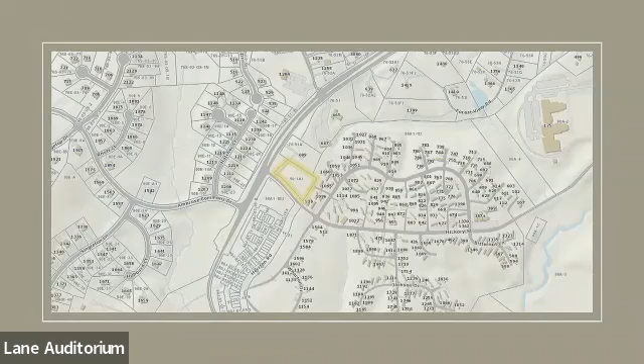This is an application for a building permit for the apartment buildings in Block 12 of the Southwood development. That site is located at the northeast corner of the intersection of Hickory Street and Old Lynchburg Road, at the northeast end of the overall Southwood development. It's the only block that falls within the entrance corridor overlay. Old Lynchburg Road is classified as an arterial from the city boundary only as far as Hickory Street, which is why the entrance corridor overlay ends at that point.

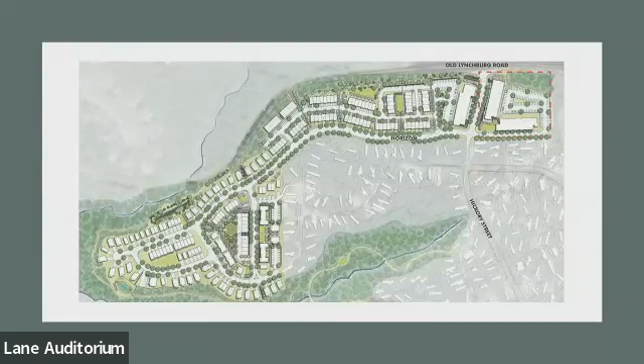You'll also recall from our February 6th meeting that the site plan for this project was reviewed without ARB input because the arterial status of the corridor was still in question when the plan was submitted. That final site plan has been approved, so your review today is not about the site plan. It's limited only to the architecture of the buildings.

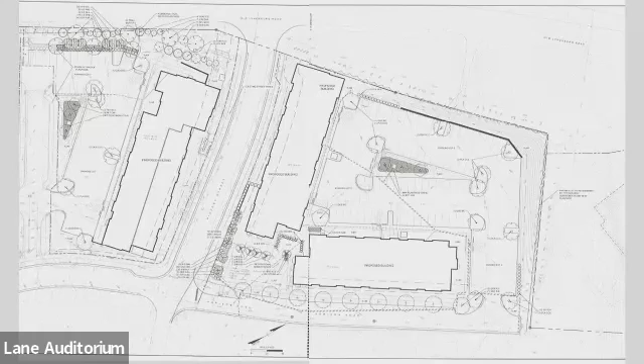One thing to note about the site plan, however, is that the trees between the corridor and the buildings are not located on the Southwood property. They're in the right of way and not under the control of the applicant. I'll just point out that the color rendering of the plan shows trees to be added in that area, which is not consistent with the approved site plan.

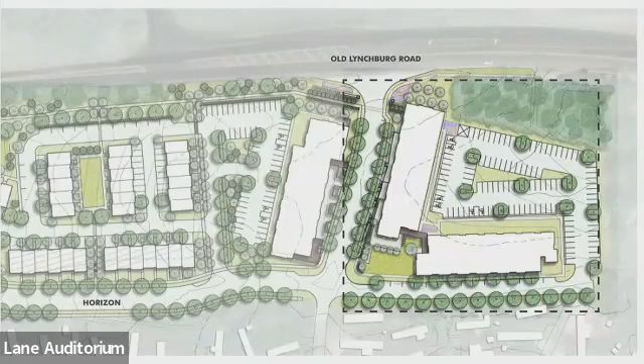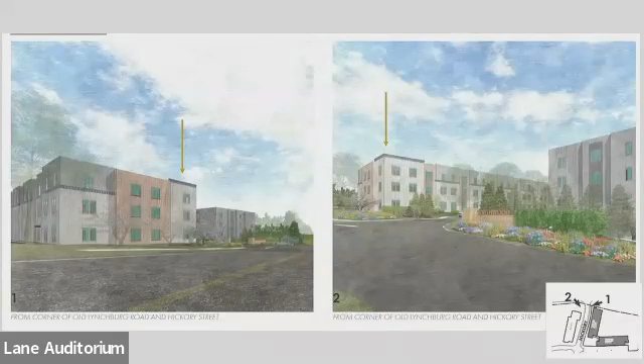The approved layout of the site orients the buildings towards Hickory Street and toward the corner where Hickory intersects with Horizon Street. Consequently, the building elevation that fronts on the entrance corridor doesn't have the appearance of a true front. The corner bay of that elevation, however, is given some extra detailing at the cornice, which is an appropriate treatment for the location at the entrance to the development at that corner. But in our analysis, we recommended that the applicant consider revisions that would establish more of a front facing the entrance corridor.

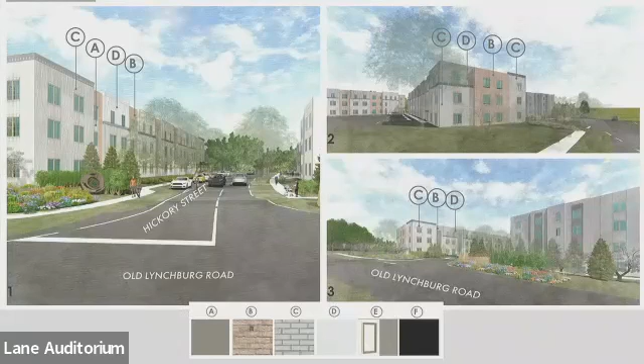The proposed building materials include two shades of brick and fiber cement panels in khaki brown and white. The shade of white is Arctic White, which the ARB has limited to trim and decorative elements on other projects in the entrance corridors. We have not recommended an alternate color in this case because the color is also used on the apartment building across Hickory Street. It's appropriate because it will contribute to establishing an integrated streetscape and an integrated overall development.

Window glass specs were not included in the original submittal, but the applicant has confirmed that the glass meets the guidelines criteria, and those specs should be added to the drawings. Finally, the applicant has provided information showing that rooftop mechanical equipment will not be visible from the entrance corridor street, and that standard note still needs to be added to the plan.

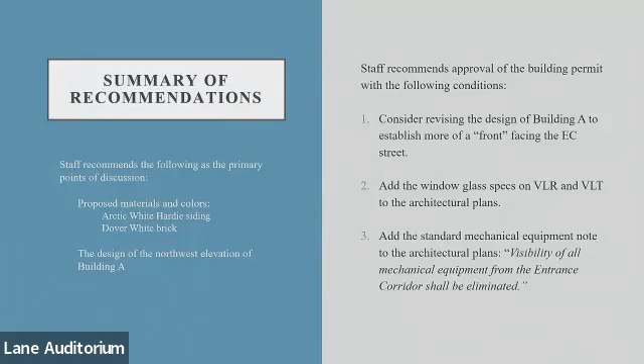So our recommendation is for approval with the condition that the two standard notes be added to the plans and that consideration be given to establishing more of a front on the entrance corridor street. Happy to try to answer any questions that you might have. All right, thanks a lot, Margaret.

If any ARB members have questions for staff, Frank, do you have any questions? No, I don't. Thanks, Margaret.

Dave, any questions? Thank you, Margaret, for highlighting that the trees by the EC are outside the applicant's control. Are there any relevant landscape requirements for parking lot trees or others that would require any trees on the site plan that are included?

There would have been some entrance corridor requirements for parking lot trees, but that would be addressed with the site plan, so we're not addressing that today. Thank you for reminding me.

No further questions. All right, thanks. I do not have any questions.

So it's time for the applicant's presentation.

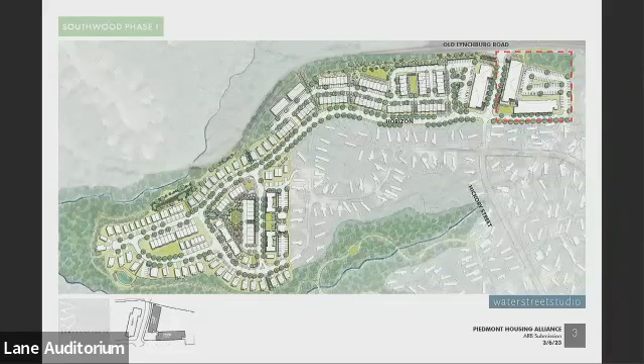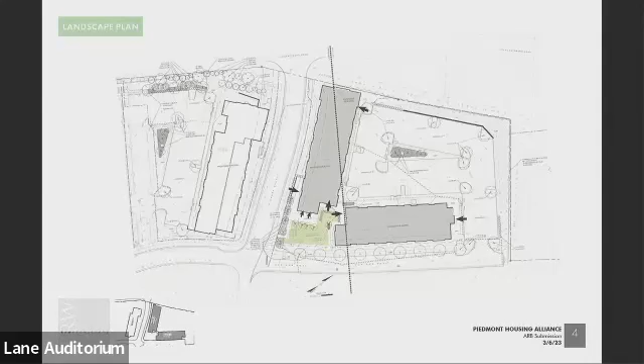The main entrance points of the building are those black arrows, either from the parking lot, but the main ones surround that first corner park, the main focus of the building design. You can also see in this small floor plan that the building is generally a double-loaded corridor. This is the first floor.

On the first floor, there are 1, 2, and 3 bedroom apartment units at the ends. As you approach that corner park, the uses get more public: the elevator, lobbies, mail room, that kind of stuff is around there, but also a community room to be used by all of Southwood.

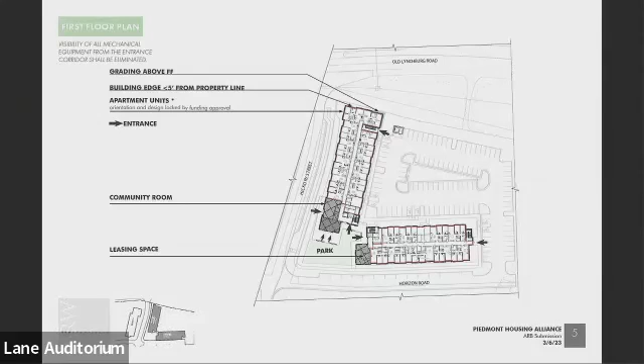And I would note that that corner park is also public and open to the public. On the other building, there's a leasing space for Piedmont Housing Alliance. That's how the buildings are designed to work.

This is the slide I showed last time we spoke, outlining the building's design and funding context and funding history, for a larger context of what the building design has been through.

I should note that 100% of the units are affordable. It's financed primarily with low-income housing tax credits, which are awarded and administered by Virginia Housing. The equity raised from the credits reduces the amount of loan required to construct the project, and that keeps the rents affordable for low-income households.

As I said, 100% of the units are affordable, and all of the units are also accessible in accordance with universal design guidelines.

The funding mechanism, LIHTC, low-income housing tax credits, is tied to a process that really kicked off for this project in February 2021, when we brought a detailed design level building to the Southwood ARB, and they approved it.

We followed quickly by submitting for those LIHTC credit awards in March 2021, and those were awarded in June 2021. The site plan that Margaret mentioned was originally submitted in the spring of that year as well. By December 2022, the final completed drawings were submitted to that funding source, and they were approved by early January 2023.

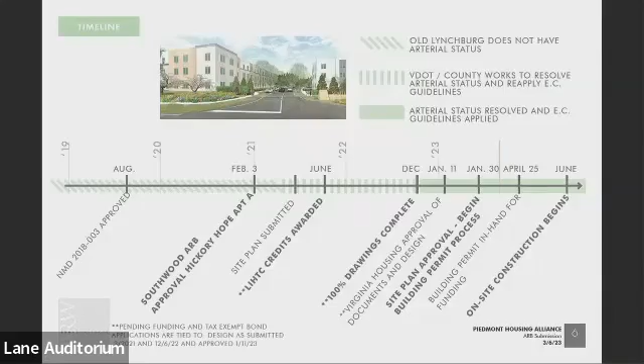And then last time we talked, we also mentioned the ARB entrance corridor guidelines and then overlaying those with the Southwood internal ARB. I mentioned we went before them in February of 2021, and they gave approval of this building, the internal ARB at Southwood. That internal ARB was created out of the rezoning for the first phase of Southwood.

It's a requirement of that code of development to have an internal ARB. I pulled out a lot of text here, but it's from the actual design guidelines from that neighborhood, and those guidelines are based on the actual rezoning itself, the tables in that rezoning code of development. And the key takeaway there is there's a lot of

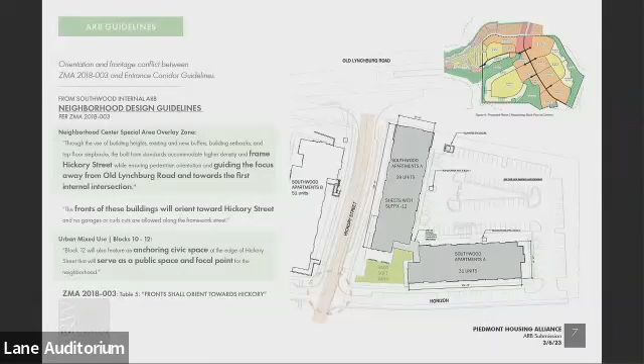emphasis on Hickory Street. In the upper right corner, you'll see an overall master plan for Southwood. The red is designated as a special highest density zone that residents see as more akin to a downtown Southwood, really focusing around this first intersection at Hickory and Horizon. And that's why that corner park is located there. That's kind of sparked the design of the buildings themselves, the entrances and everything, to be focused around that park.

I know that the comprehensive plan, and I think the Southern and Western neighborhood master plans, really want to increase the orientation and the entrance corridor guidelines on this road front, but it doesn't exactly exist yet. So the Southwood residents, and per the Code of Development, are really trying to create a walkability within their own neighborhood, and hence this hub around this park.

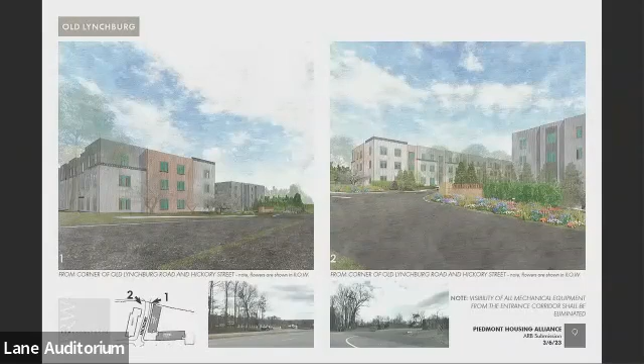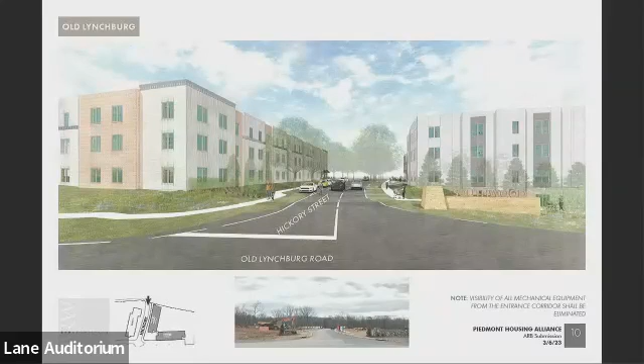So now I'll jump into these drawings, which we've seen from Margaret's presentation. These are the southbound first, and then the northbound on the entrance corridor of the building, and then the approach into the neighborhood, the building on the left, and then adding that corner park render to the other three, just to show the hope for the building that by using a variety of materials on these faces, we are hoping to increase the activity in that area and reinforce that with the design of the building.

So apartment A buildings are meant as one of two bookends to the main entry of the Southwood neighborhood. They're designed, like I've been saying, to pull the visitors into the neighborhood to that first main focal point, which is the corner park. They're designed to try to mitigate the large scale of the building, which is kind of inherent to the economics of the multifamily building, by providing bays that break it down to the scale of the townhome.

So let's see, I guess another thing I will say about the design of the building, which I know is not fronting the entrance corridor, but it gives more context for the overall thinking of the building, is that it's trying to emphasize the corner park as the active hub and frames it with the buildings, and it's meant to offer a variety of textures and layers there that point to that as kind of the entrance of the building.

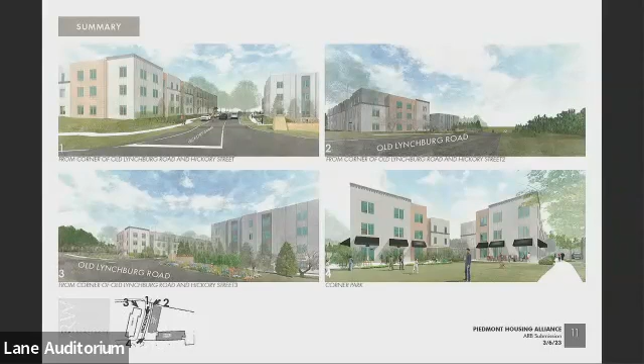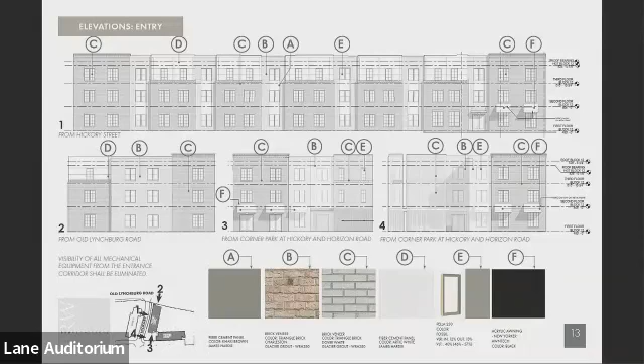And the rest of the views are shown here. So number 2 is actually the face that is for discussion today. It has the cornice high at the corner, again trying to be a bookend to that entry point. And then the other faces are the two that front on the park. You'll see there that an awning comes into play, again trying to signify that area as the most public.

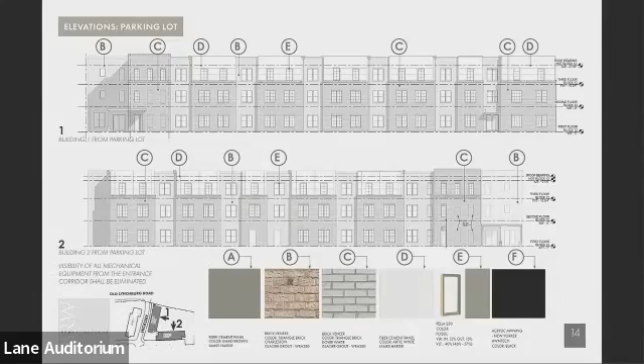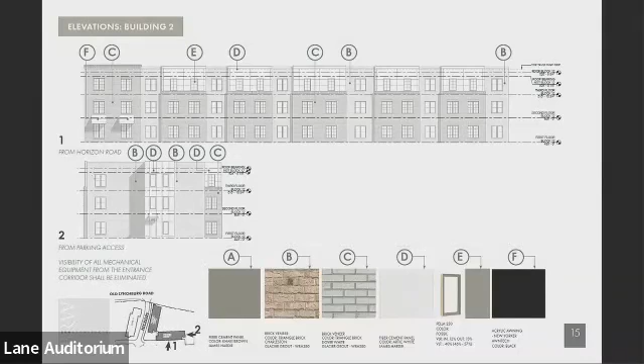Same materials. And then marching around that building, not visible from the entrance corridor, side one, the long side, very similar. And then on the short end, also not visible from the entrance corridor, is an area of entrance point. So that's a summary of the building.

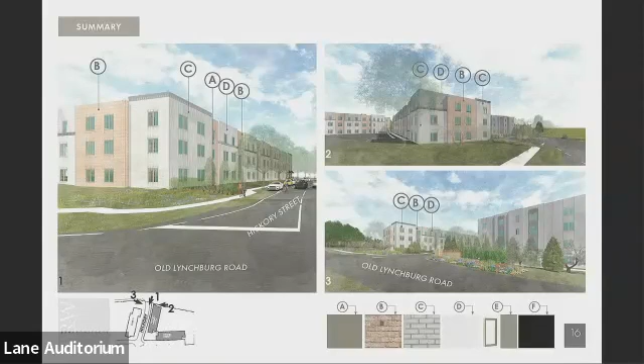And here again are those main entry perspectives. And that I think is the end of my presentation.

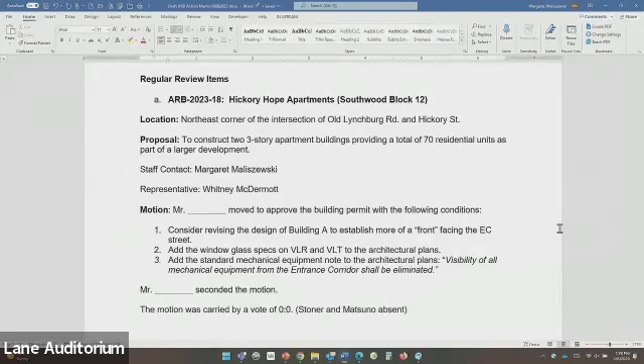Dade or Frank, do you have any suggested modifications? I don't have any at this time. I don't either. No, I don't either.

Would anyone like to make a motion? Sure, I'll move to approve the building permit with the following conditions as listed below, items 1, 2, and 3. I'll second. All right, great. Let's put it to a vote.

Mr. Vanderwerf, Aye. Mr. Hancock, Aye. Mr. Henningsen, Aye. Thank you. All right, thanks a lot.

We'll move on to our work session. We have one work session today, on the entrance corridor design guidelines addenda. Mariah, is your presentation ready?

Yes, thank you. Hi, everyone. Thank you for your time and continued work and review of this project. Today we'll be reviewing the draft entrance corridor addenda for Route 53.

Route 53 runs between Route 20 south of town and the Fluvanna County line. The corridor is fairly rural in character, but contains several notable landmarks and developments accessed along the way, including Monticello and Michie Tavern. Regarding zoning, with the exception of a short length zoned Monticello Historic District near the entrance to Monticello, properties along the corridor are zoned rural area.

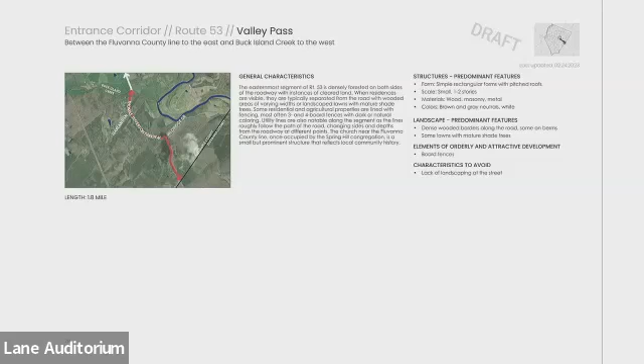The corridor is divided into three segments, and I'll go into each of those. This is the overview sheet from the corridor. Starting at the Fluvanna County line and working toward the center of the county, the first segment is called Valley Pass, for the area topography and experience along the roadway. This segment is densely forested on both sides with instances of cleared land. When residences are visible, they're typically separated from the road by wooded areas or landscaped lawns with mature trees. Board fencing is also a prominent feature along this segment.

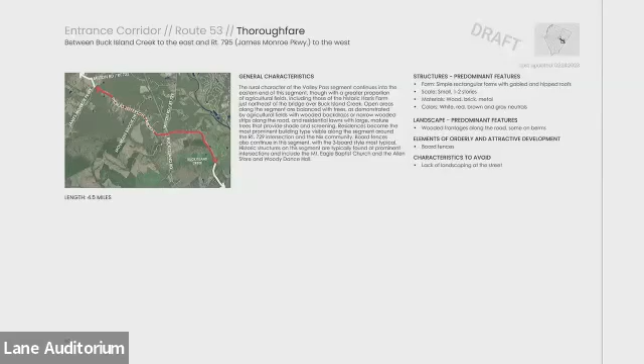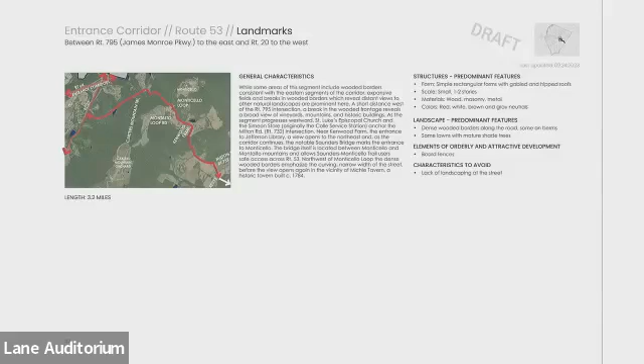The last segment we referred to as Landmarks. This segment is characterized by wooded borders consistent with the eastern segments of the corridor, though expansive fields and breaks in wooded borders reveal distant views to other natural landscapes. Prominent developments along this segment include St. Luke's Episcopal Church and Simeon Store, Jefferson Library, Saunders Bridge, the entrance to Monticello, the Saunders Monticello Trail, and Michie Tavern.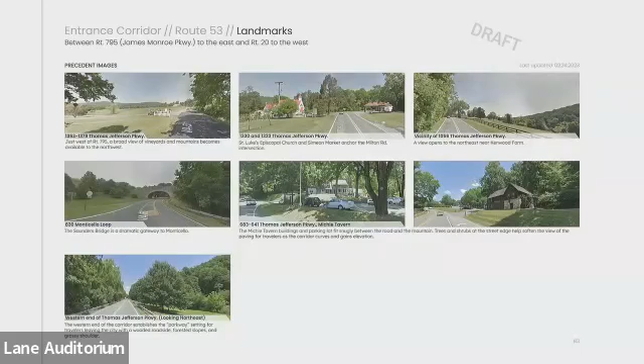We'll start with questions. Frank, do you have any questions? No, I don't think so. Super important corridor, obviously.

You mentioned the Monticello view shed - is that actually... did you mention some sort of overlay, the zoning district? There's a Monticello Historic Zoning District. Would that be visible on this map? It would be, it's just a very small area right around this area.

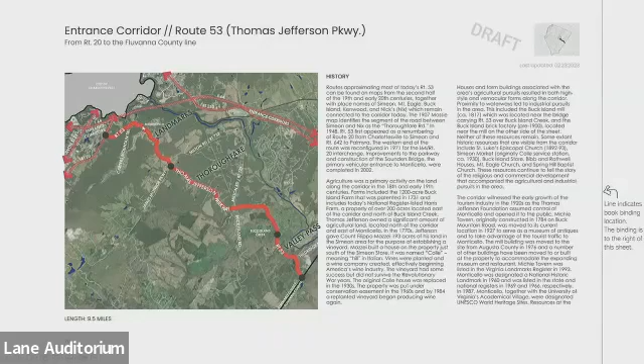Just thinking about the importance of the historic resources on this corridor, and reminded back to the time we reviewed a large solar development on this corridor. Some of the things we wrestled with actually went away because of the arterial status, I believe. Is that right? Maybe not.

Your review of that was prior to that, but the ARB's concerns were really all about the landscaping and the landscape screening, and that was part of the other applications under review. So that really wasn't lost. It was a long time ago, Margaret, I apologize.

But that's a case study for maybe some of the land use or projects we would see in a corridor like this, or rural corridor. Thinking about the things we highlight in this addendum that could guide an application would be helpful - the broad vistas, the opportunities or instances where things are completely screened and what that looks like. I know you mentioned the fence, and this corridor has a lot of the characteristics of some of the western corridors we've already looked at.